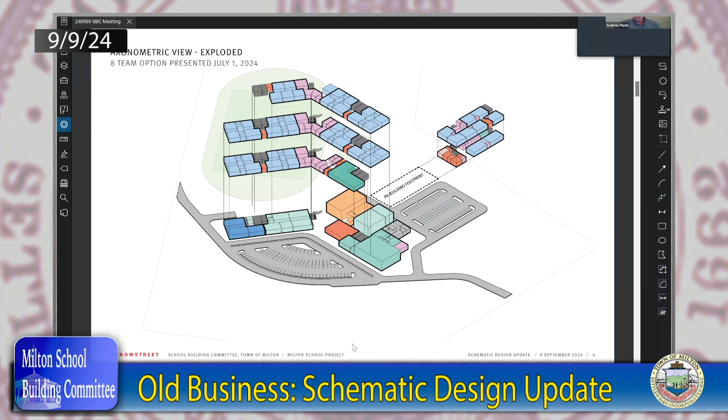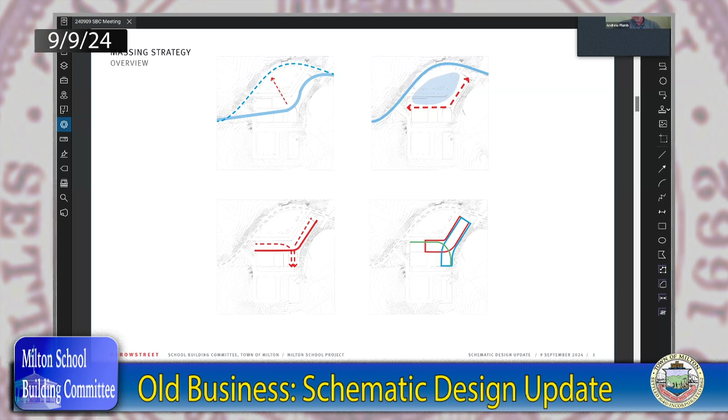During schematic design, we start to think a little bit about what we call the massing, the shape and look of the overall building. I wanted to take a minute to walk you through our progress. I'm going to show you four diagrams that walk through how we are responding to the site, and how we've arrived at the shape and organization of the building as a result of understanding the needs and demands of the site.

As we all know, the first step has been about relocating Gile Road. The heavy solid line here is the existing approximate location of Gile Road, and the dashed blue line is where it's getting relocated to. The main benefit of doing that is that we're capturing territory in order to build the school.

In doing that, we create this zone where the majority of the arrival and drop-off activities happen and the parking happens. The red line here represents the main mass of the building and how it's responding to that, as the inversion of Gile Road. The benefit is that the building will have a very nice way of presenting itself when you're arriving to it. It has this cradling shape that allows you to approach it in a way that feels very comfortable, and that's been present in the diagrams we've shown you throughout.

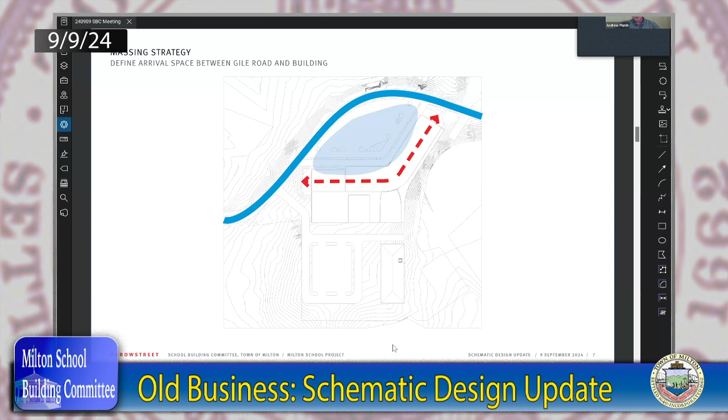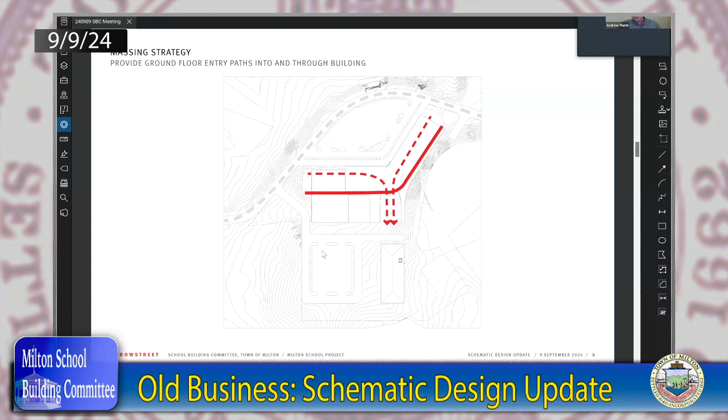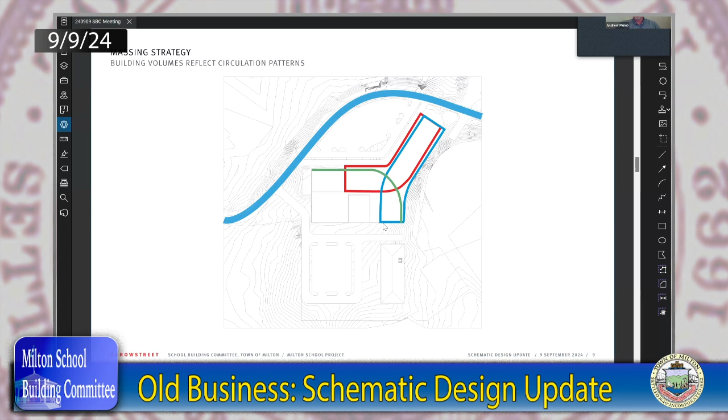When we started to get a little more detailed about the layout, we also thought about how you enter the building from the two primary sides off of Gile Road. So we have these three forces, if you will. One is this arcing shape opposite of Gile Road that defines the big move. Then on the ground level, we have two paths coming in and through the building. That way of looking at it starts to set up some basic organizing shapes that we're looking at in three dimensions.

I'm going to zoom in on this one a little bit. When you start to think about those shapes as a building form, we can see how those ideas about the lines I just went through are starting to take shape as a building.

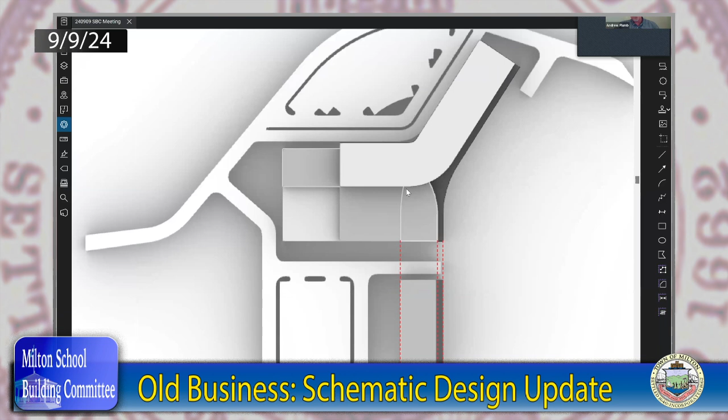If we look at that as a three-dimensional view - let me zoom out here - if this arcing line on the bottom of this image is Gile Road, then you see how the overall mass of the building is opposite that. At the ground level, there are opportunities for the paths to move into and through the building, relating to the pre-K space beyond.

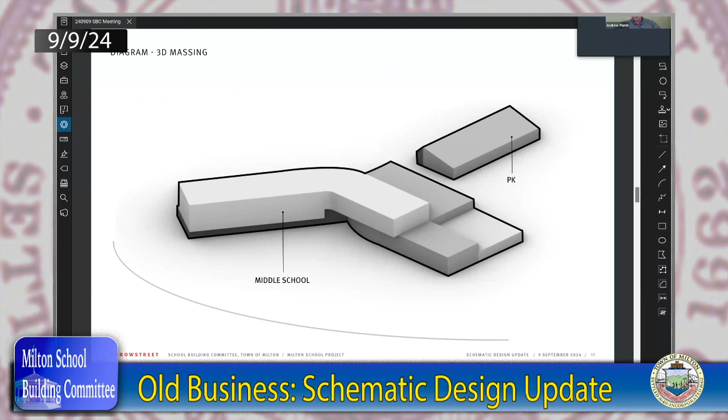So that's some of the thinking going on while we're fine-tuning adjacencies and layouts. Because at the end of the day, it's going to work and everything's going to be well located, but we also want the building form and shape to be something that is architecturally sound as well.

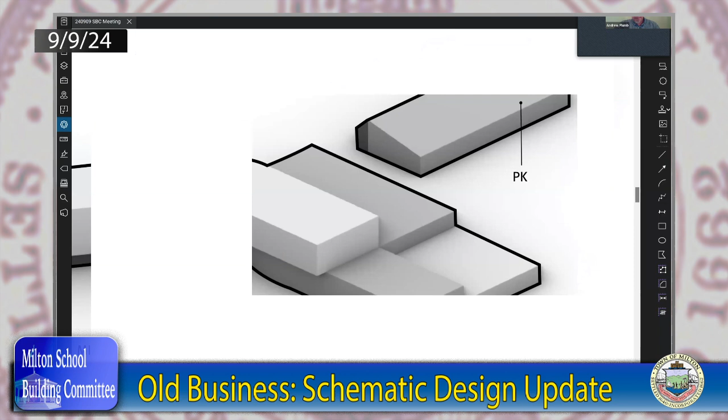So, okay, I'm going to start here on the fourth floor. Whoops. Apologies.

I think the main thing to point out here is that we've got three teams on this level, and with each team we are centering it around a shared learning commons. At the two ends, you're seeing the hallways getting wider to create this space. At the team located in the middle of the plan, at the bend in the bar, we're imagining that learning commons can be located along the southern edge, which would get the benefit of a lot of great natural light and would be related to the space where the stair will be located. These clusters you're seeing here are the four primary classrooms, one of which is the science room, happening at the two ends and at the center as well.

As we go down through the floor plans, you'll see that we have located the special education programs interspersed throughout.

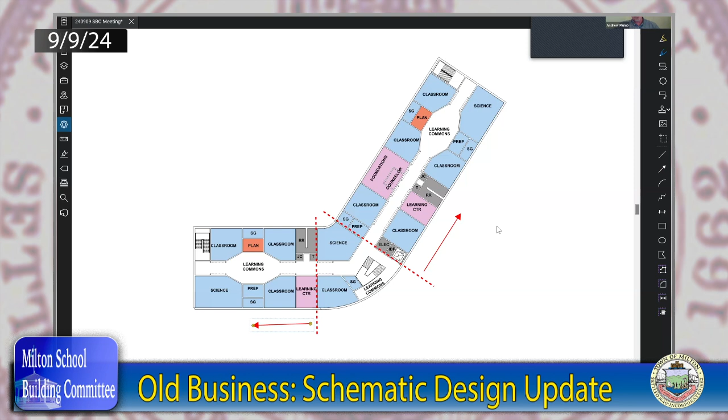One thing I want to point out is that there's a very straightforward structure to the building. If I try to draw a couple lines here, hopefully that shows up. From that location this way, and from this location to the left on the plan, you have a very straightforward orthogonal structural grid and repeating bays.

We've made sure to stack the floors on top of each other going down and align hallways and things like that. What that means is that, yes, there is this bend where the building is responding to the site. But we think this can be achieved because it's limited to a very specific area, and it's happening in a place where it's not very difficult to do, which is where we've got most of the vertical circulation in the center of the school.

So I'm going to go down to the 3rd level now, and you'll see that it's very similar. Again, we've got 3 teams, a little bit of a different mix in the special education, but again working to locate those in between teams, so they're equidistant from the different groups.

I'll now move down to the 2nd floor. Actually, before I move down, are there any questions about these 2 floors? Because they're very, very similar in how they're set up.

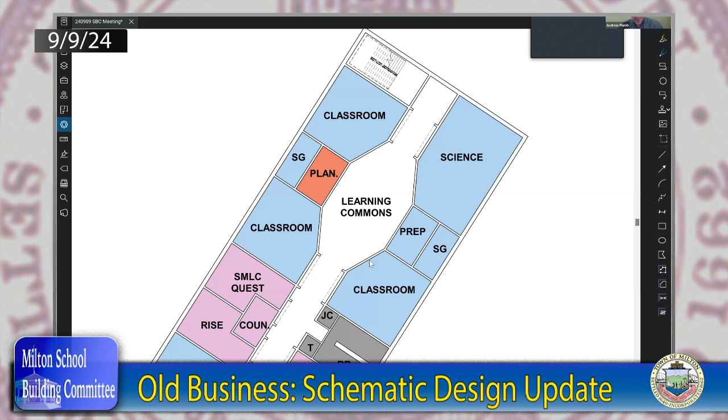We can come back to these floors if questions come up. Is the refresh really slow for you all too? It's painting slowly, drawing in real time here. I'm going to try to go to the next page anyway. Andrew, you don't happen to have that on your desktop, do you, or is it on the network? It's on the desktop, believe it or not. Now it seems to be catching up quickly - oh, suddenly we got speed.

So now we're looking at the second floor, which has one team up on the northern wing, similar setup to what we were just looking at. It's got the media space on the southern lobe above the cafeteria, and there's a zone where we imagine some overlook - a double height space along the edge with a nice view to nature on this side.

And then the remainder of the floor is composed of world language classrooms and special education classrooms that are sort of trying to be evenly intermixed. I think one of the things to think about is if the 7th grade and 8th grade each have 3 teams, and one of the years has the need for an extra team, this would likely be the way that it works. I suppose there's a couple of ways it could be done, but I think thinking through the utility of having this team on this floor is something worth the group talking through, or just thinking about.

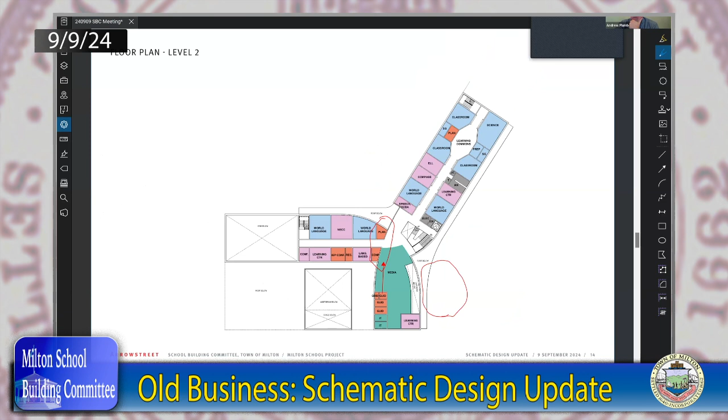So I'm going to go down to the first floor. I think it's refreshing relatively quickly now. Jinxed it. Item 4—no, just kidding. It's the suspense.

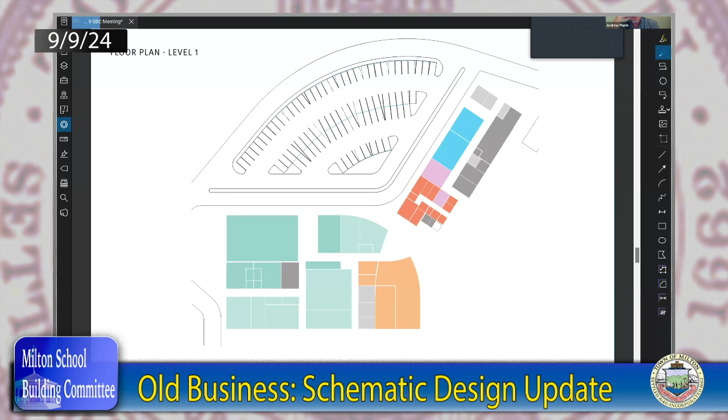As this is drawing, I'll preface this floor a bit: in the last week or so we've been digging in more deeply with the civil engineer about the grading, especially where the north wing of the building comes alongside the athletic field of the high school. Understanding the existing conditions there, we've decided to move some of the mechanical spaces and areas that don't need windows into that zone, using the building itself to act as the retaining wall rather than having classroom spaces that we'd then need a separate retaining wall near in order to get light in. That's why you're seeing the block of dark gray on the right-hand side of the northern wing—I think this is the biggest change we made since last Thursday's meeting, so you haven't seen this at all.

So we don't have to have the road continue or be continuous behind the building. It just has to extend a certain dimension past so that the hoses can reach—250 feet from one side and 250 feet from the other. That's why you see a little bit of that extension, and if we had the rest of the site plan to the south, you'd see an extension there as well. But it doesn't have to be continuous.

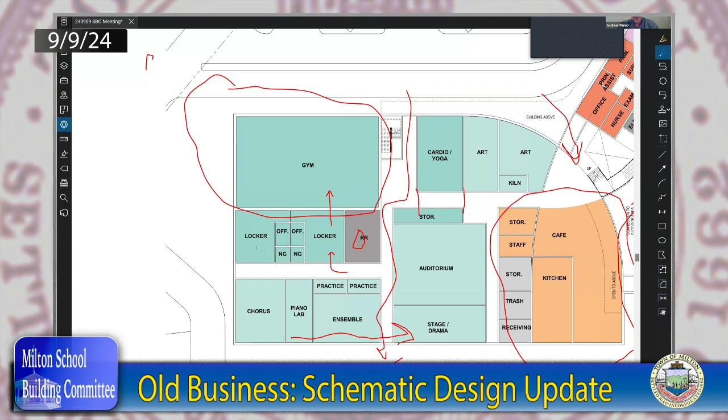The other thing we've tried to do here is create a path that goes from one side of the building to the other, which we're imagining for nighttime, off-hours, weekend performances in the auditorium and/or the gym. That would allow you to close down the building somewhere close to here, and that wing would be in use, with restrooms for those attending events in that zone. So we thought that was starting to work out pretty well.

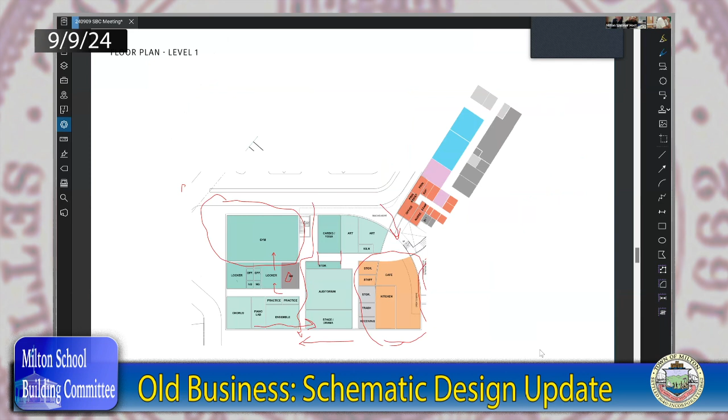Also in that, we pulled the ensemble room and others down near the stage. Peter, we talked about that on Thursday, about making those the green room or prep area for backstage activity. That seems to be working in the right direction.

That corner of the building actually has some really nice light, and rather than give all that to the mechanical spaces, we flipped it, and it seems to be working out. So where the back-of-house spaces are, that gray rectangular area is where we're required to have a retaining wall. It's going to be tall enough to cast a shadow, so it doesn't make sense to put classrooms there—it just makes sense to put back-of-house spaces.

Plus you have that fire access road turning in a little bit, so if those spaces need to be serviced, it can be done from that backside without having a bunch of utility trucks sitting in front of your building or blocking the access road between the middle school and the preschool.

Is the building wall going to be a retaining wall, or is it going to be a separate retaining wall? It's a separate retaining wall right now. Ultimately, it'd be nice if we can get the building to use that as a retaining wall. You're not referring to the first pass at it? Right, if it's a 10-foot tall retaining wall, then get rid of that.

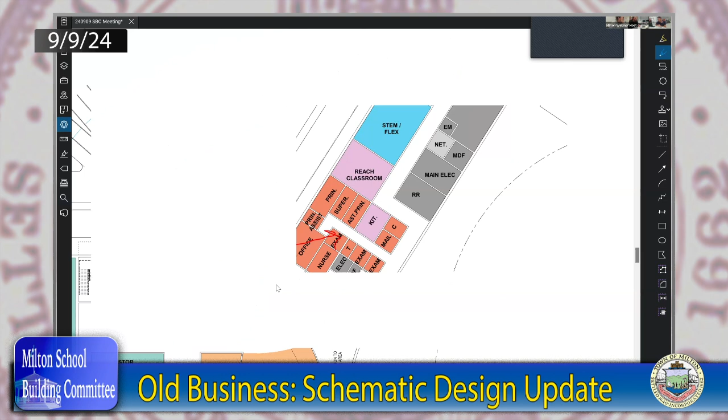That actually is a good question — can the storage live inside the cardio yoga room, as a separate room, or access within that room? Because that's a separate room access within that room. We should look at all of that to see. There's still a couple things that need to be solved, pushing and pulling.

I think auditorium, just size wise, I'm just curious with having the high school right next door with a huge auditorium, could you steal space from that for these?

So currently we're holding square footage enough for 350 seats, but we really have to do a layout to see where we land, because we're trying to work with the slope of the land, accessibility and all of these things, and see how they play out with that particular shape. So that's also one of the next steps, to see where we land. The aim was 350 seats, but we're open to discussion about if that's the right size.

I was just curious, since there's kind of reduced space for this, there might be some sharing opportunities with the school right next door.

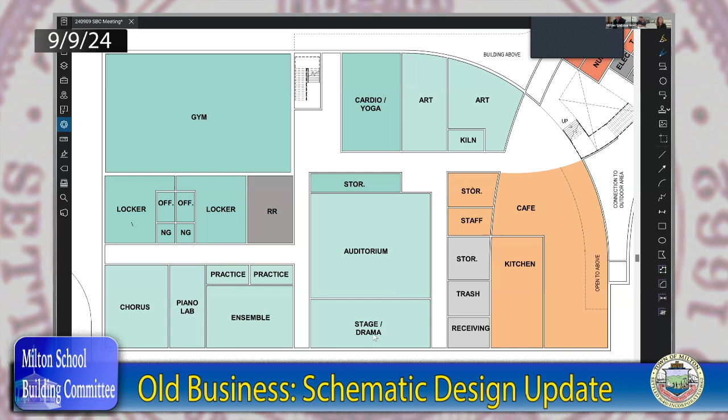You can keep going, Andrew, if you have others. Sorry, no more questions, I think, on the first floor. Okay.

I think that's the extent of what I've got on the building update.

Now I'm wishing that you guys had shared the presentation and I just said next slide. Totally fine.

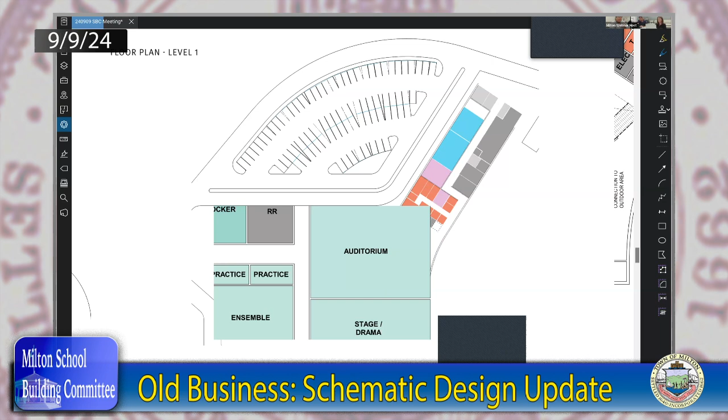So that was pretty much the end of the slide deck. When we email it out, it will have the schedule in there. But again, as I said at the beginning, we're aiming for October 18th for the schematic design. And then we've scheduled out from January onwards for the pickup of DD and all the way to construction. You've already seen that schedule, so we can include that. But really, we're just barreling towards this October 18th deadline. Lots to do. Looking good.

Also in the appendix, which we don't have to go over, are the plans from July 1st. So we'll include those as well, so you can be reminded of where we were and how we landed here.

Any other questions for the architects? Comments on schematic design that we were just looking at? Double check online, make sure nobody has a hand raised. Thank you as always for your work. Good comments. Thank you, guys.

All right, keep moving on. So item 4B, MSBA update. As everyone remembers from our last meeting, we got invited by MSBA into, I think it's called their senior study or something like that, where they're going to be coming to the district to visit the Cunningham School.

It's basically the next step on our statement of interest. So they're coming on the 17th, 12:30 to 3:30. There's a certain amount of us that are going to attend with them to walk through and give them the tour. So we're meeting with Dr. Redden, scoping out a list of things to see there, specifically even the 4th floor Cunningham that we're looking at for renovation, and just basically walk them through the school at that point. So as far as our update with MSBA, that's kind of what I have.